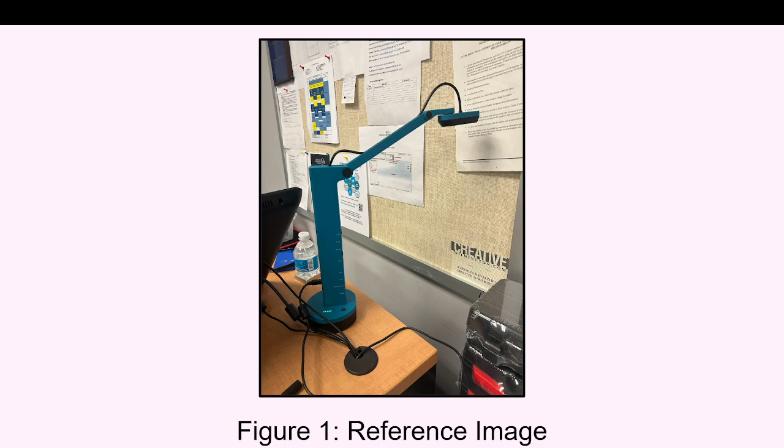This is SOLIDWORKS modeling design of a document camera, presented by Daniel Reagan, Madison Bard, and Nakar Cahoon. This project was done for DFT 170 Engineering Graphics, taught by Dr. Hans Chapman. This is a reference image of the document camera that is being used for our final project.

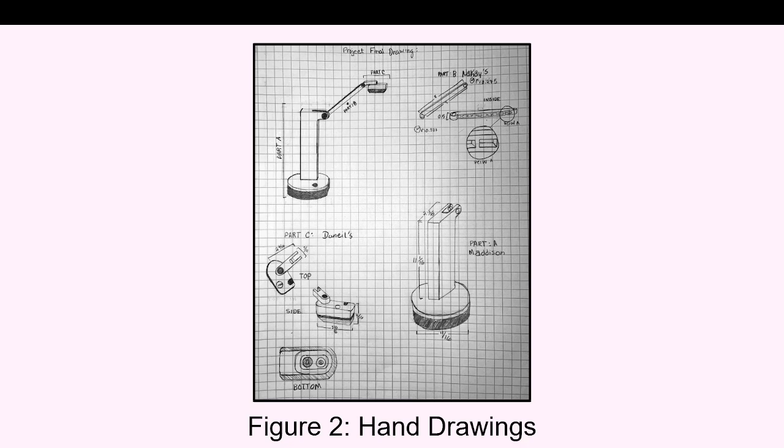This is a rough sketch of our brainstormed ideas. We sectioned it out into 3 parts. Part A as the base, Maddie will be doing it, and Part B as the arm, I will be doing it, and Part C, the camera lenses and the attachment part, Daniel will be doing it, along with the dimensions for each size and the circle and circumference so that each part will be fitting together nicely.

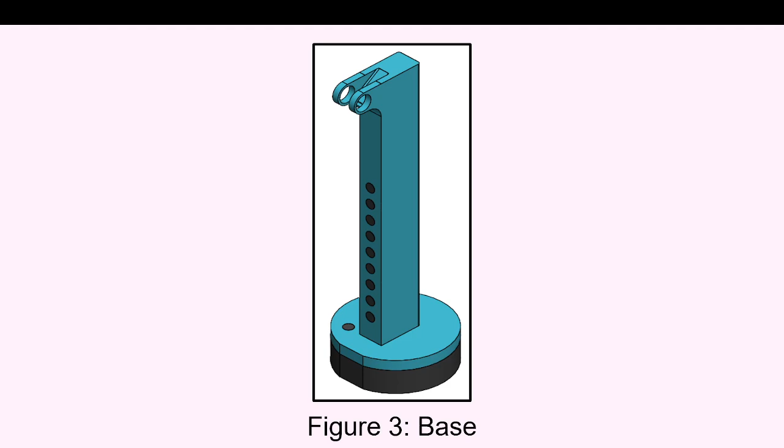This is figure 3, the base. The base was created by sketching a circle and extruding it. A rectangular sketch was extrude cut, creating a flat surface. Another rectangular sketch was extruded on top of the cylinder, and a circle sketch was extrude cut from the top. The linear pattern was used to create the buttons.

Here's figure 4, the arm of the document camera. First, we made a rectangle and a circular base and extruded it upwards. Then we cut 2 circumference holes at different endpoints with different dimensions. Then we had the bottom part. We used the linear pattern to make rectangle cutouts. And at the top of it, we extruded a long rectangle hole, adding a lid on top of it so that there's still enough room for the wiring to go in and out of.

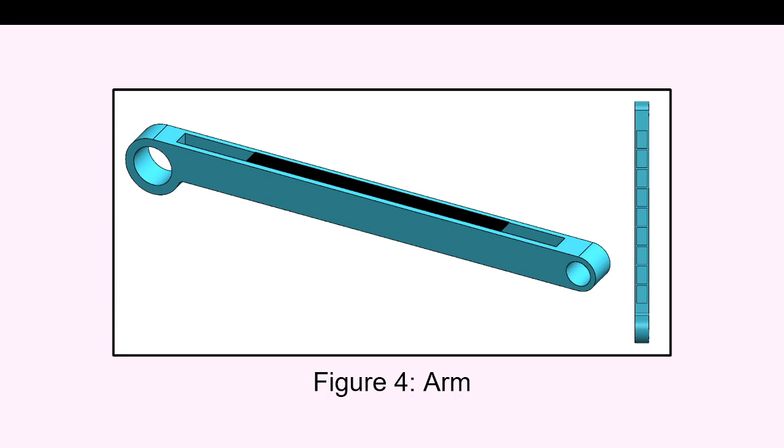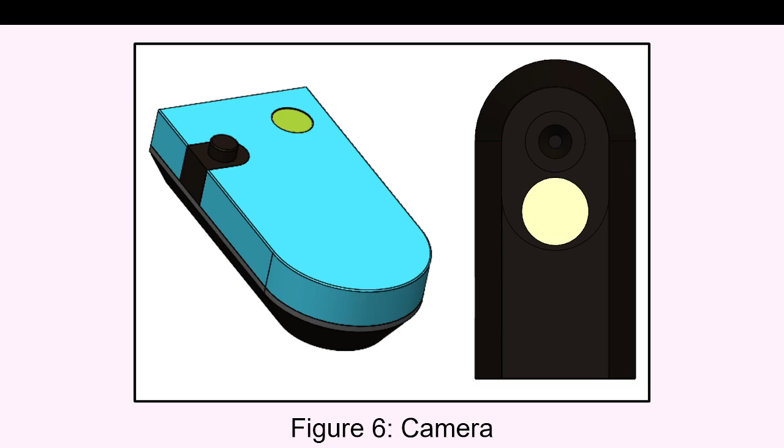In figure 7, the complete assembly, you can see that we have placed all of these pieces together using concentric and coincident mates. You may also notice that there are cylindrical pieces added on here that did not have their own slide. We decided not to include individual slides on these, since they were just cylinders, that would seem redundant.

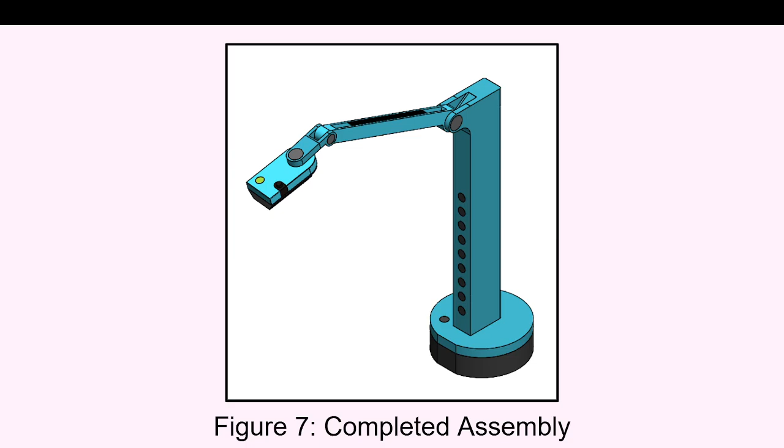For figure 8, we have the drawing document of the document camera. Over here to the left side is the front view. On top of it is the top view. Then to the far right of it is the side view. And then on top of the side view is the isometric view.

Labeled in A is the detail view of the camera and the attached part to it. Labeled in B is the full section of the cutout in between the object. And our material used is plastic for the part, glass for the camera, LED for the lighting.

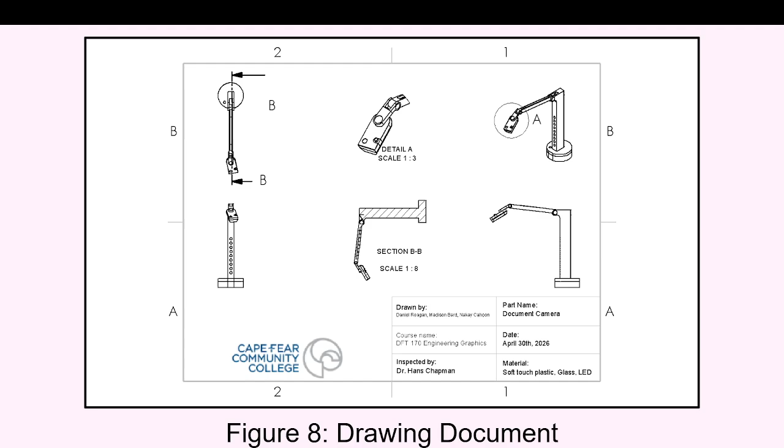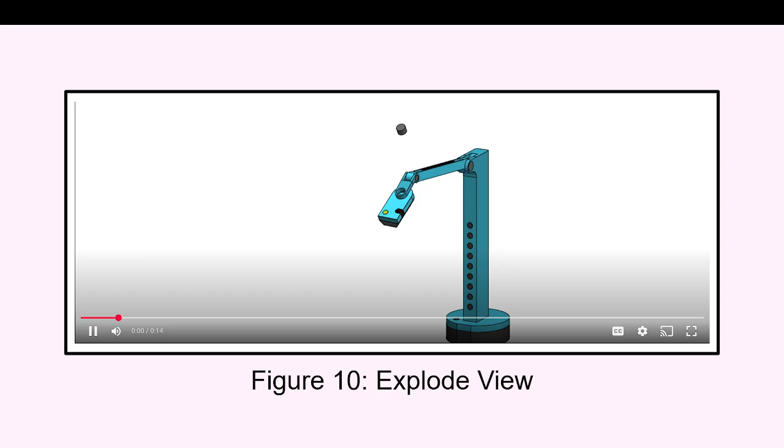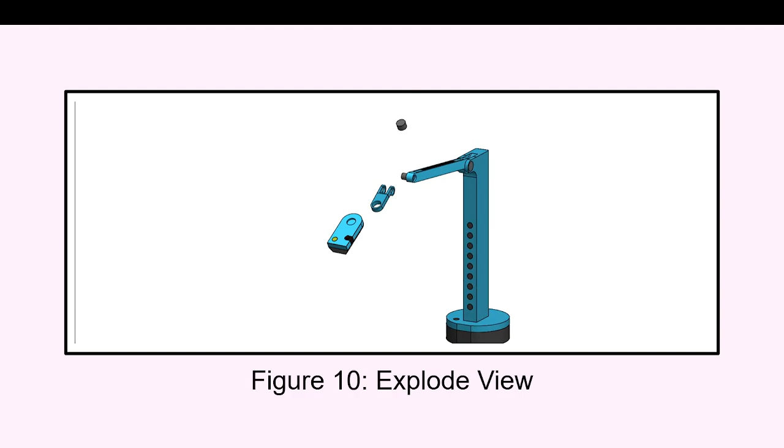Since there were so many moving parts in our assembly, we decided to include 3 additional animations, showing the arm moving up and down, the swivel joint moving up and down, and the camera moving back and forth.

Overall, throughout this project, we have followed the engineering design process utilizing many different skills, beginning with hand drawing the parts, sketching and dimensioning them in 2D in SOLIDWORKS, and then using 3D tools such as extruded boss/base, revolve cut, fillet, and many more. And then we used simulation and animation tools to showcase our final product.